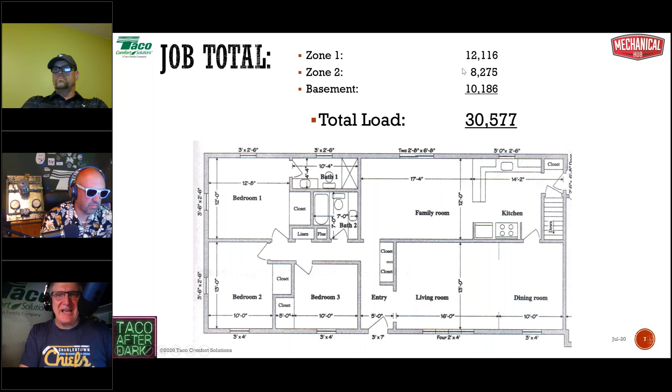We'll talk about boiler selection maybe next week a little bit, but suffice it to say, we're not going to find a boiler that small. We're going to be finding a boiler bigger than this, and the question is just how much bigger. We're going to do the very best we can. So here's our total load of 30,577, and it's broken down by zone. Zone 1, 12,116 BTUs. Zone 2, the bedrooms, 8,275, and the basement, 10,186 BTUs.

Alrighty, let's take a quick look at zone 1 in the particulars. There's all of our pieces of radiation, and the total load is 12,116. So we've got to find the flow rate. And to find the flow rate, we're going to divide the BTU load, 12,116, by the product of delta T times 500. Okay, that's the universal hydronics formula. We've beaten you over the head with that through 2 different Taco After Dark sessions. I hope we understand how important that formula is.

So GPM, the gallons per minute flow rate you need to satisfy the heating load of a zone, is equal to the BTUH load of that zone divided by your designed for delta T, or the temperature drop of the fluid as it goes through the system, times 500. Now 500, of course, is that mathematical constant that we use with 100% water.

It comes from multiplying the weight of 1 gallon of water, 8.33 pounds, times the number of minutes in an hour, 60, times the specific gravity of the fluid, that's 1, times the specific heat of the fluid, that's also 1. So 8.33 times 60 times 1 is 499.8. Hey, I'll call that 500. So that's where we come up with 500. It just makes the math easy.

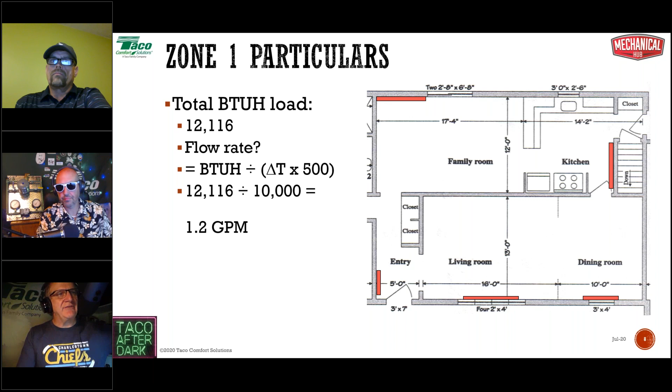So we do our math, 12,116 divided by 10,000. We're looking at about 1.2 gallons per minute of flow. That ain't a lot of flow. That's a very small amount of flow, 1.2 GPM for that zone. All right, so we know that's the flow rate. Now to size a circulator for that zone, we have to figure out the head loss of that zone.

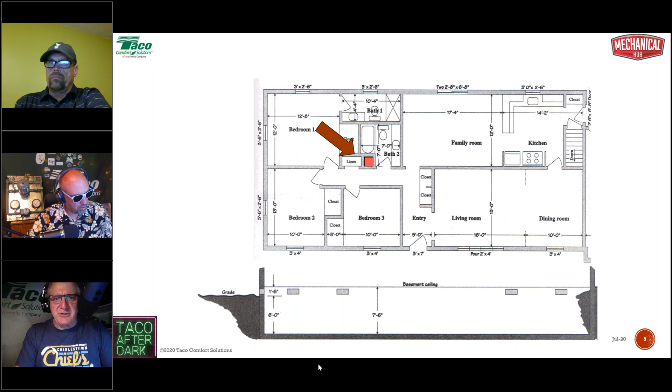So again, we've got to figure out where we're going to stick our boiler. If you take a look at that picture right there, there's the flue right next to the linen closet, and we're just going to go regular old boiler here. We're not going to get crazy or anything. So that regular old boiler is going to be down there in the basement, right underneath that. Okay, so there's your flue pipe, and there's the boiler right down there in the basement.

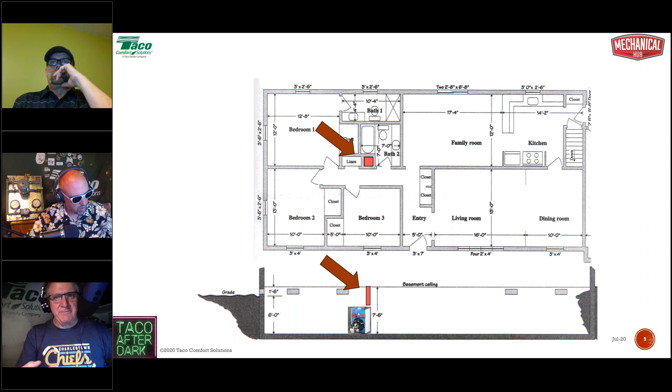So we can kind of estimate from this point how much pipe we're going to be running through all of those zones. So we can take a look at it like this, okay? There's our basic zone for that first floor. So we've got 8 feet, we've got another 10 feet, we got 20 feet there, 6 feet there, 16 feet there, and so on until we go back down to the boiler.

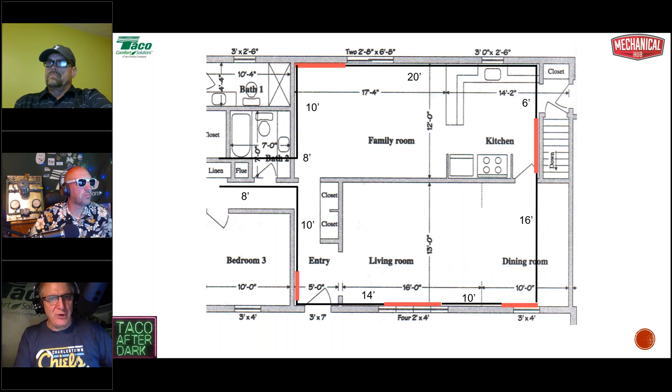And that's just, we can measure that on the plans. If we were doing the installation, we'd measure the pipe as we did it, or we'd take our very best educated guess as to how long that run would be. So we go through our additions here.

Now I got our entire first floor run of just pipe is 102 feet. The element in the baseboard, 25 feet. The up downs, we're going up, we're going down, we're going up, we're going down, is about 20 feet. And then the up down for the boiler might be another 12 feet. Total run, we'll call it about 159, 160 feet total from the gazouta side of the circulator all the way back to the gazinda side of the circulator. So that's our total run.

Now, if we were to estimate the head loss, this is your Friday afternoon, 5 o'clock, I got to get something down here, estimation. We would estimate our run, in this case, 159 feet, and then we'd multiply it by 1.5. That's going to allow for valves and fittings and stuff that's in the way, right? Fittings have the same pressure drop as pipe.

A 3/4 inch copper elbow has the same pressure drop as 2.5 feet of straight copper pipe. A 45 has the same pressure drop as 1 foot of pipe. A T has the same pressure drop as 5 foot of pipe, et cetera, et cetera. We can't count them. We're going to allow for them. And we're going to basically add 50% to the length to allow for those fittings.

So 159 times 1.5. And then to estimate the head, we'll simply continue multiplying, and we're going to multiply by 0.04. 0.04 represents 4 feet of head loss for every 100 feet of straight, properly sized pipe at the maximum flow rate for that size of pipe. You got to remember that part, guys. So 0.04 represents 4 feet of head for every 100 feet of straight, properly sized pipe at the maximum flow rate for that size of pipe.

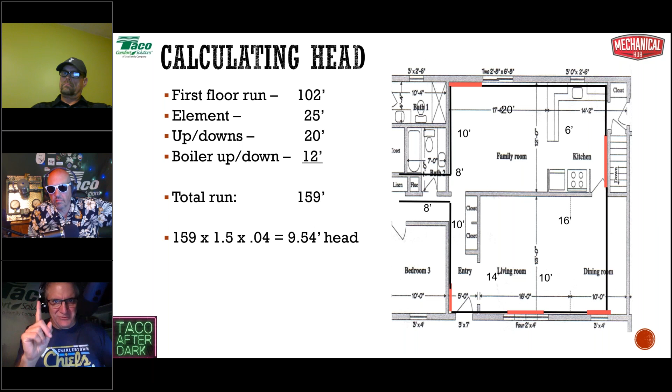So if we wanted a circulator just for that one zone, it would need to do 1.2 gallons a minute at 9.5 feet of head. Your 007 is going to handle that with no problems whatsoever. All right. But we also got to understand that's way more pump than we need. It's way more pump than we need. How much more pump? I'm going to show you how much more pump.

If you've been through these sessions before, you've seen this chart before. This comes from the Copper Development Association's Copper Tube Handbook. And it's a mind-numbingly dull book, but this one chart is pretty cool because it gives you the pressure loss of water due to friction in types K, L, and M copper, and it gives it to you in PSI per linear foot. So this is the pressure drop in PSI.

When we deal with pressure drop in our piping systems, we talk about feet of head. We have to convert PSI to feet of head, and we do that by multiplying whatever the PSI is by 2.31. Now, that comes from basics of day one of plumbing school. I don't know if you guys went over this in plumbing school. A column of water 28 inches high or 2.31 feet high will have a gauge pressure at the bottom of 1 PSI. Doesn't matter how big around it is, just how high it is. 28 inches or 2.31 feet high.

Now, the engineers will talk about PSI in terms of pressure drop. We deal in feet of head. All right, so whatever the PSI is, we multiply it by 2.31. That's the feet of head loss that we're talking about. It's got nothing to do with the height. It's got nothing to do with how high the building is. It's just how we express pressure drop on our end of the business. So yeah, that's kind of where we're at.

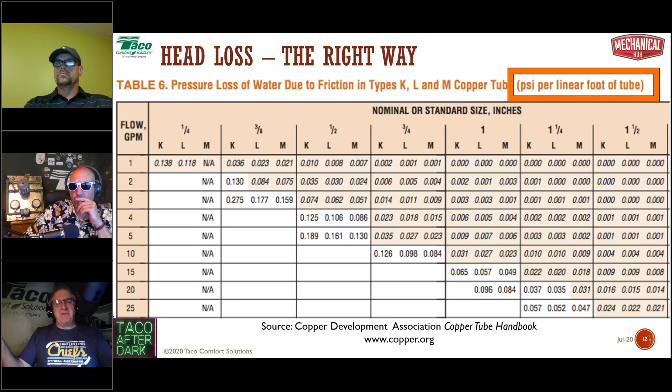So let's presume if you were doing copper fin tube baseboard, chances are you've got 3/4 inch element, and your default is to go to 3/4 inch pipe, right?

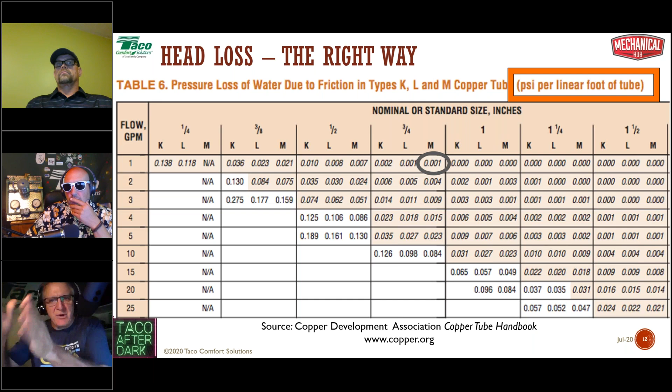3/4 inch pipe at 1 gallon a minute. My pressure drop through 3/4 inch type M copper is 0.001 PSI per foot of pipe, or 1/1000th of a PSI per foot. All right, that's not a lot of head loss, 0.001 PSI per foot. So let's math this out again here. 159 feet times 1.5, because we've got to allow for the fittings. That's going to give us 239 feet.

Now let's multiply 239 times 0.001. That's going to give us 0.239 PSI. That's the pressure drop, 0.239 PSI. So to turn that into feet of head, we're going to multiply by 2.31, and we're dealing with 0.6 of a foot of head. That's not much, okay? You could just get an aggressive hamster running through one of those exercise wheels, and that'll give you enough to pump 1.2 gallons a minute through that pipe. That's 0.6 of a foot of head.

Do you remember how we estimated? We came up with 9.5. All right, there's the difference. Now, I remember I said earlier the default is 3/4 inch copper, right? But 1.2 gallons a minute kind of fits in the wheelhouse of something else. I want a show of hands here. What would you guys say to using 1/2 inch pipe for this zone? Let me know what you think. Type something in. I'd like to hear what you guys have to say. Would you use 1/2 inch pipe for this zone?

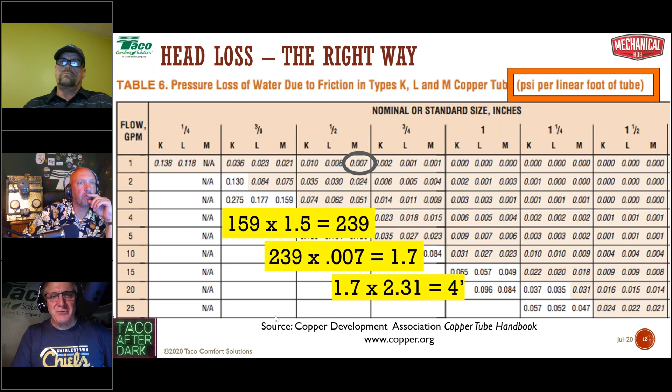Absolutely the head loss would change. But it also gives us the opportunity to use 1/2 inch pipe or even 3/8 inch pipe at this point. I mean, there's so many options here, man, when you're dealing with such small loads, you could do so many different things to the point where you could get yourself into that paralysis by analysis thing. So let's move on here and look at the rest of the house, okay?

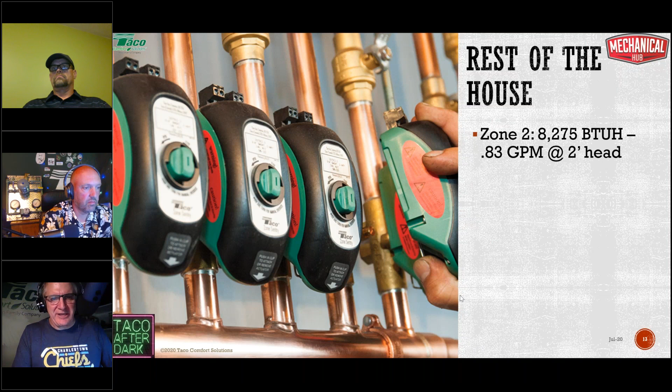Now, zone 2, we're looking at zone 2. In zone 2, we were talking 0.83 GPM, okay? It's 8,275 BTUs. We math that out. That comes up to about 0.83 GPM at a little less than 2 feet of head, okay? Not much, just about 2 feet of head. And again, we're talking 1/2 inch pipe, and if we go to the basement, 10,186 BTUs, that's about 1 gallon a minute. Again, right around 2 feet of head, depending on how you pipe it up.

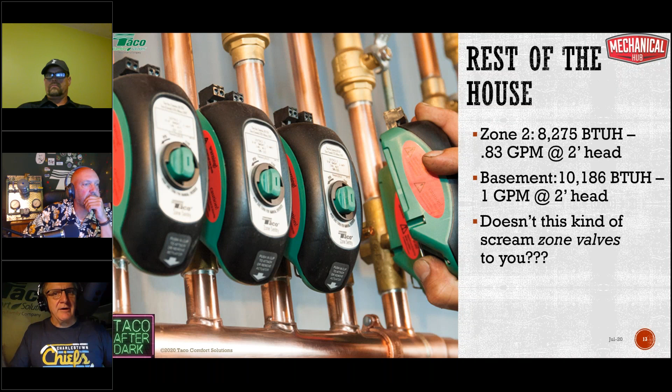So what this tells me is, right now this is kind of screaming zone valves. If I'm looking at this thing, I can't come up with a rationale for putting one circulator on each zone. Can anybody else? That's doing finished carpentry with a sledgehammer. If we've got one circulator to do 0.83 GPM at 2 feet of head, another circulator to do 1 gallon a minute at 2 feet of head, and a third circulator to do 1.2 GPM at 4 feet of head, that doesn't make any sense. If anybody feels differently, let me know.

But Dave, what do you think? Oh, I'm a zone valve guy all the way. I just prefer it, I know the capacity of these things on the circulator and what it's going to do. So, yeah, that's the way I'm designing.

Yeah. Robert O'Brien says, you guys sell circulators, right? And we also sell zone valves. So we got you going both ways, bro. We got both. Yep. We got both. Buy all you want. We'll make more.

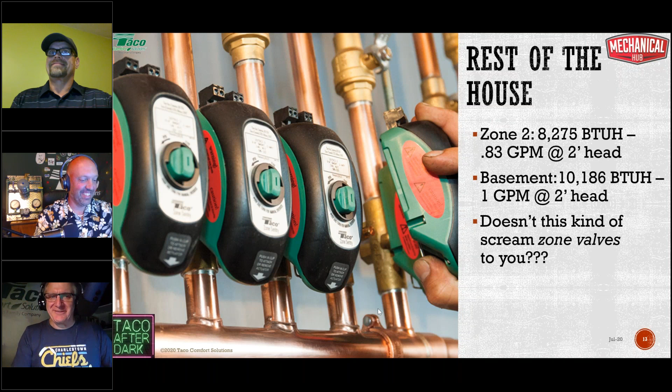Okay, so here's what we're looking at. We got 30,577 BTUs. That total flow rate's going to be just over 3 gallons a minute, and I got 4 feet of head, 2 feet of head, and 2 feet of head. Now we know head's not cumulative. When we're sizing a circulator for zone valves, we don't add all the head together. So it isn't 4 plus 2 plus 2 equals 8 feet of head. We just have to overcome the head loss through the worst case zone. If we overcome that, we can overcome the others. If I can do 4 feet of head, I sure as heck can do 2 feet of head.

So that's a common mistake people make when sizing circulators. The most common mistake is, well, I got to go up 3 flights of stairs, I need a higher head pump to get all that water up there. No, we don't, because up and down doesn't matter. It's a closed loop. The other most common mistake is, I add all the head loss together for all of my zones, and then I need one big honking pump for my zone valve jobs, and it is not necessary. In this case, 3 gallons a minute, 4 feet of head is what we're going to need.

Now let's take a look at a typical Taco 3-speed circulator, the 0015 3-speed, and pretty much anybody's 3-speed circulator is going to have virtually identical performance curves. Nobody's all that different. And we've got low, medium, and high. We'll put the 0010 off to the side for a moment, because the 0010 is a different cat altogether, even though it's a circulator and you certainly could use it here, but we're going to focus on the 0015. So let's take a look.

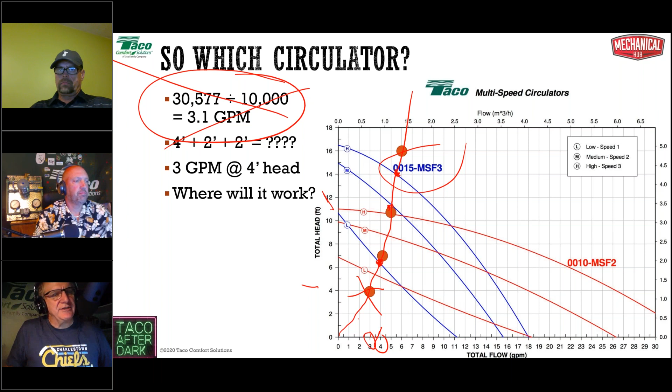So under design conditions, if we go back to that universal hydronics formula, GPM equals BTUH divided by delta T times 500. My BTUH is still 30,000, but now I'm at 4 gallons a minute and not 3. That 20-degree delta T I designed to, never going to see it. The best I'm ever going to see is 15. So that 33% increase in flow results in a 25% decrease in delta T.

So instead of the water going out at 180 and coming back at 160, it's going out at 180, coming back at 165. And the low temperature model, if it's going out at 140, it's coming back at 125. Doesn't sound like a big deal, but we're shrinking that delta T. What, folks, is that going to cause the boiler to do? We all know this. It's going to cause the boiler to short cycle, and it's just going to get worse because it's always going to be at 4 gallons a minute, even if that goes down.

All right, even if it will go down at 50% load, that's going to be 15,000 BTUs. I'm still going at 4 gallons a minute. That's going to be at 7.5 degrees. And you can see we've got a boiler that's going to be bigger than it needs to be anyway, right? Because we only need 30,000 BTUs. If it's not a ModCon boiler, it's still going to be bigger, and even if it is a ModCon boiler, if the turndown ratio doesn't go down that low, that boiler is going to short cycle even more.

All right. This is normal hydronics. This is what we do. But this, folks, is where we get our efficiency. We want to make sure we match the flow to the load as best we can. With this application, yeah, you know, we're okay. It's not horrible, but this is as good as it's going to get. All right. I just want to show you the rest of the other zones as we put them in here.

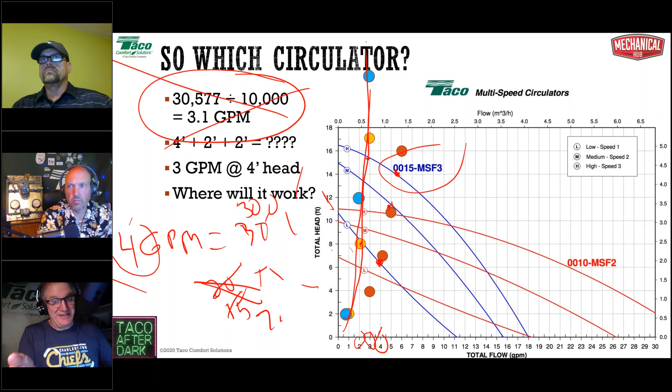If you use the 0010 here, I swear the 0010 at low speed would be a far better choice than the 0015. I guess the 0010 is going to be a more expensive pump. It's designed to be a B&G 100 Taco 110 replacement pump, on the return side of those big old honking boilers, that's what it's designed to do. But in this case, it'd be a better choice. It'd be a much better choice.

Okay, and that's why you want to make sure that, hey, I'm gonna make sure I pick the right pump performance curve by going to that low speed. If I go to medium speed, I'm saving some watts, but I'm still not doing myself much of a favor in terms of the incredible shrinking delta T. And I say, "Oh, the hell with it, I'll just put it on high and walk away and be safe." Well, I've got no variable speed in this whatsoever. All I'm doing now is I've cut my wattage in about half. That's about it. Okay, not a bad thing.

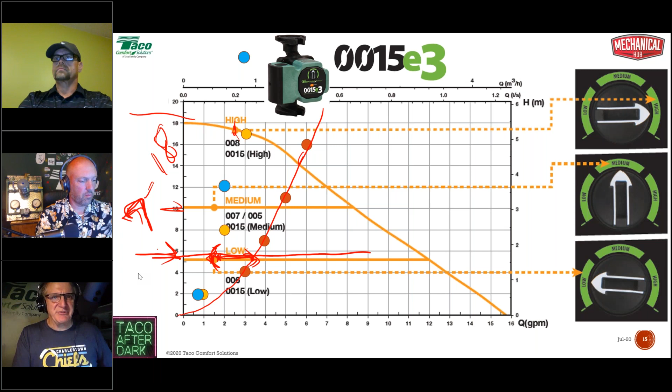So hopefully that helps you. Now, before we turn it over to Kevin, and again, we're gonna go over all these questions here. Boy, oh boy, Kevin, I didn't leave you much time, man. I'm sorry. That's okay. We got to talking. We got to talking. Alrighty.

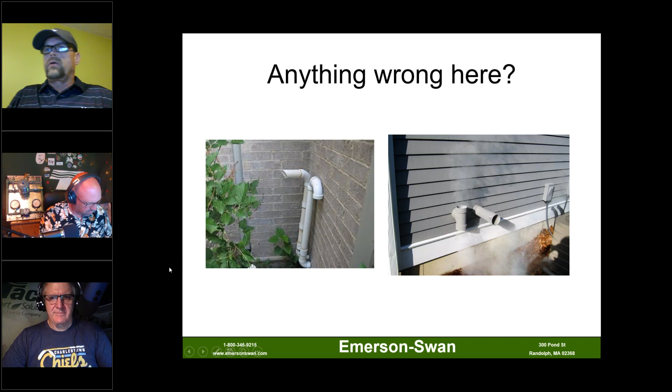For you oil guys, having to step outside of the house and take a peek at vent terminations also is pretty key, because you may find something obvious. It may be more difficult to locate a problem, but if these vents aren't working right, well, we got a problem, because in my not so humble opinion, the vent is simply the most important safety device on the appliance. Without pulling any punches, what's the vent doing?

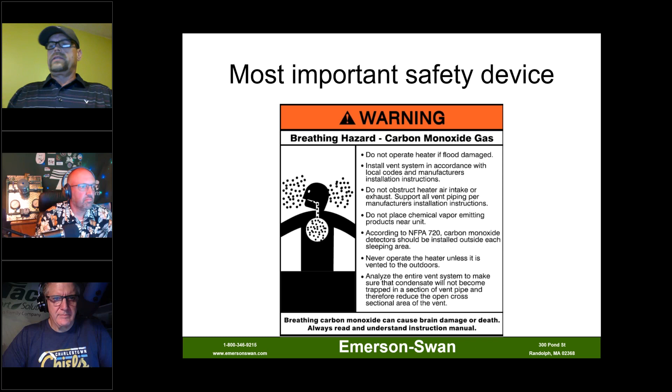The vent is basically taking what could be poisonous gases, in the worst scenario deadly gases, and moving them from a conditioned space to the outdoors where they're diluted and become less or not a hazard to the occupants inside. So the device that's moving poisonous gas out of the space is, arguably, the most important safety device. If that's not working right, then your combustion's not working right, and the safety of the occupants is in jeopardy.

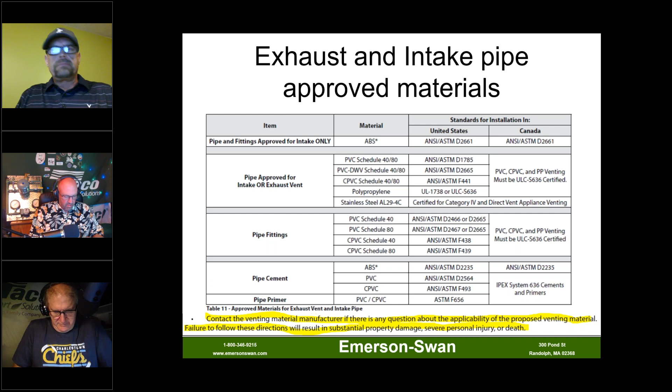Another thing we want to take into consideration on vent systems, right off the bat, is if they're built properly. The bottom line, if you look down at the bottom of that slide where there's a little highlighting, is if you ever have any question on the material, whether it's approved or not in your application, then contact the venting material manufacturer and ask them directly what the limitations are on that product and whether it's applicable for your job or not. So there is a level of due diligence that needs to be applied.

Whether you're working with gas or oil, there's various materials to work with, and before we put a combustion analyzer in a pipe, we better make sure that pipe is actually working right. You have venting options these days: natural draft, power vented, induced, and now balanced venting and unbalanced venting, pressurized, negative pressure. We have to know what we're venting into, how it's working, and if it's appropriate for the job. Again, if the vent doesn't work right, the combustion's not going to work right.

One of the things required for proper combustion is time. You need to hold those hydrocarbons in the heat exchanger, in the combustion chamber, long enough for a complete burn and for the energy to be exchanged. One of the many functions a vent does is provide just enough back pressure or static pressure against that flame to hold that combustion inside the heat exchanger. So if the vents aren't configured right, it's going to relate to several problems, most certainly including combustion.

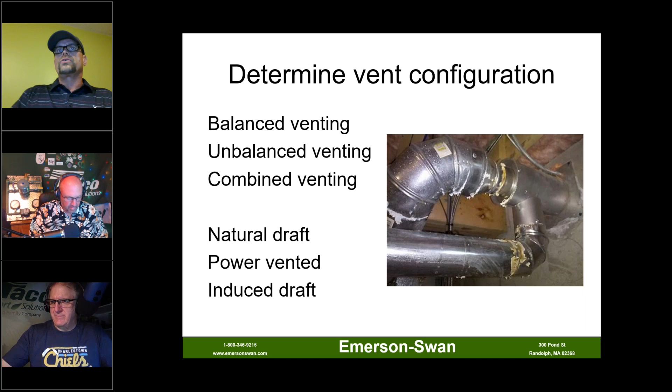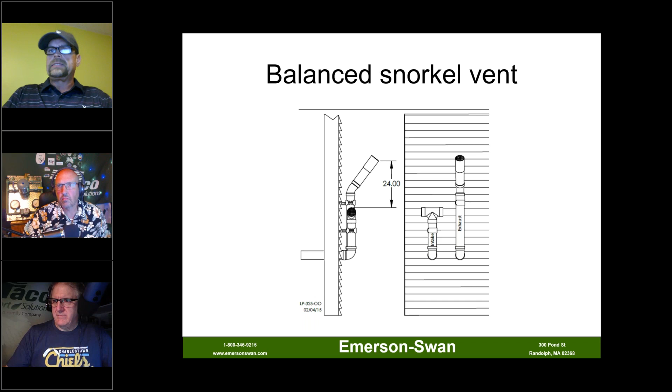So various options, whether it's a sidewall vent on a mod con boiler or snorkeling. Quite often we have to configure pipes to come up higher than snow grade. We're coming out of the side of homes, perforating quite often right down around grade level, so we have to bring these pipes up above grade, and even the way we do that is very specific and precise. There's diagrams laid out in all the install manuals.

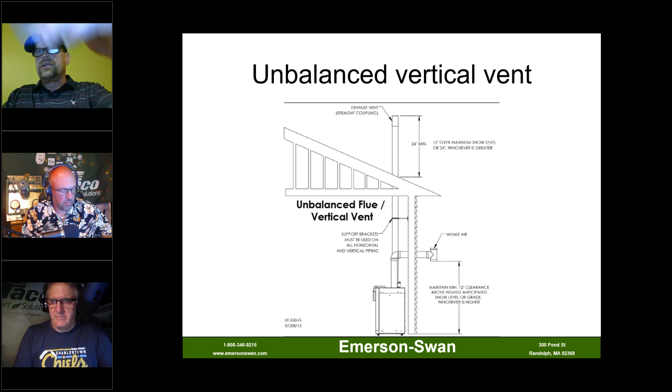So you have to know all of these systems. Yes, it seems daunting, and certainly it can be, especially for someone new to the field. But if we consider the vent the most important safety device, I'd be boning up on vents pretty quickly and early in my career. You also have unbalanced vent configurations where you can have pipes going through roofs and shorter pipes coming in, and understand that unbalanced is okay in certain configurations.

Using indoor air for combustion air: quite often, if there's enough air in the room, people aren't bringing an air intake pipe to the appliance. But it's never recommended to use indoor air for combustion air, because quite often the quality of the air is considerably poorer than bringing it from outside, not to mention getting into negative pressure situations.

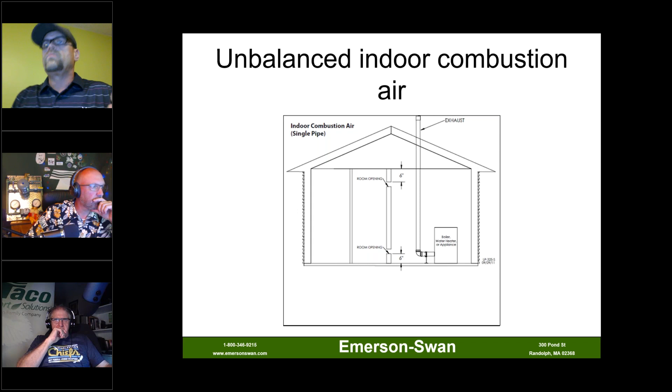And as you know, what will happen now, you'll have your negative pressure and it goes back to your combustion. So when we talk about confined and unconfined spaces, the bottom line is if you have 50 cubic feet of air per 1,000 BTUs, well, then you're in an unconfined space, and technically you don't have to bring combustion air in. But again, remember, it's always recommended to bring the outside air in when you can to avoid negative pressure, higher infiltration factors. There's a whole host of reasons, pets, dryer lint, all sorts of things.

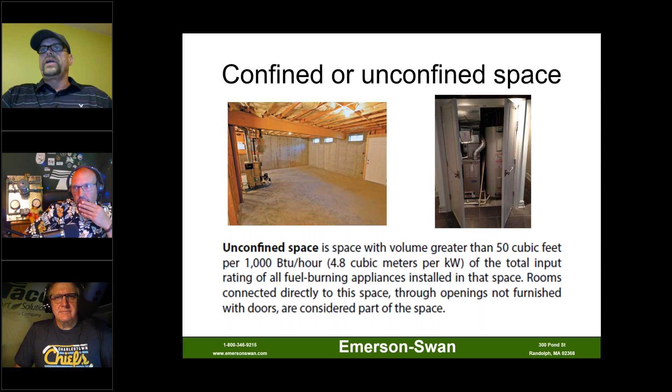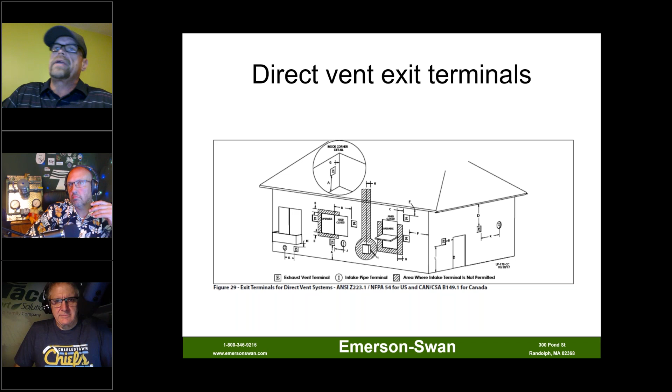They work as one. We have to be cognizant of where the vents are terminating. There's a lot of rules and regulations about windows and mechanical openings and mechanical air intakes, et cetera. So all of these things, I mean, it's a lot, but they're in the manuals. We should be able to find them. And once again, any questions, you always run it by the manufacturer. I know I'm laying on this vent pretty heavy here, but I can't stress enough, if the vents aren't right, your system's not going to work right.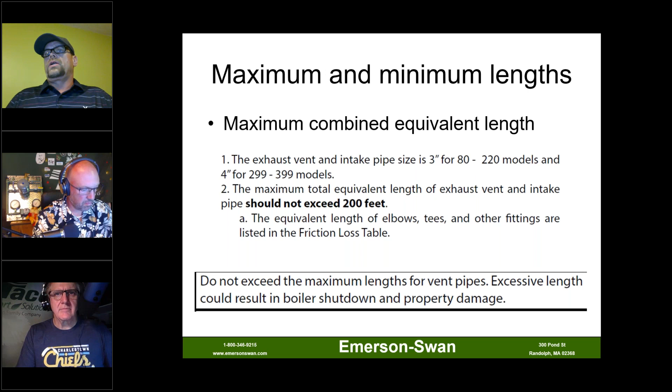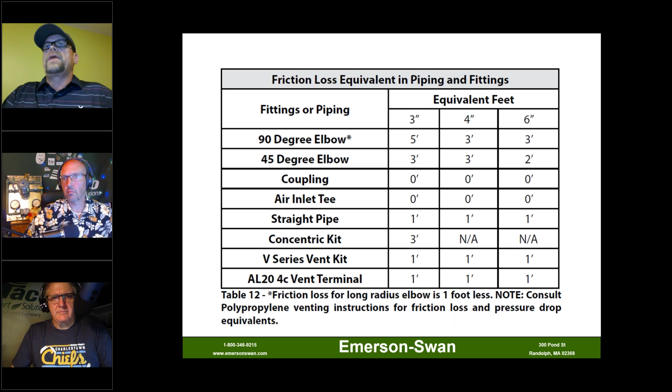You have maximum and minimum lengths on all these vents, and exceeding maximums or going below the minimums are going to cause their own particular host of problems related to combustion and safety. Just like sizing a circulator pump, when you have all your fittings out there and you're figuring your head, there's flow restriction of your flue gases through the fittings of the vent pipes. So we need to be aware that there are friction equivalences, and we have to figure all that into our lengths of our balanced and unbalanced systems to make sure that we're not suffocating, if you will, the equipment.

So, hey, Kevin, I've got a question here for you. Yeah. This is from Robert O'Brien. Do you consider objects in the cubic foot calculations? He has hoarders in mind. Oh boy. That's a good question. I haven't heard that one before. It's a great question, but I tell you what I'd be concerned with hoarders too is, I know it sounds crazy, but here comes the technical geek in me, you have a lot of off-gassing that's going to occur in that situation where you could be actually contaminating the combustion air coming in. So whether or not it's for air, even just for safety, I'd be bringing in outside air in those situations because the bottom line, a hoarder is only going to occupy space, unfortunately.

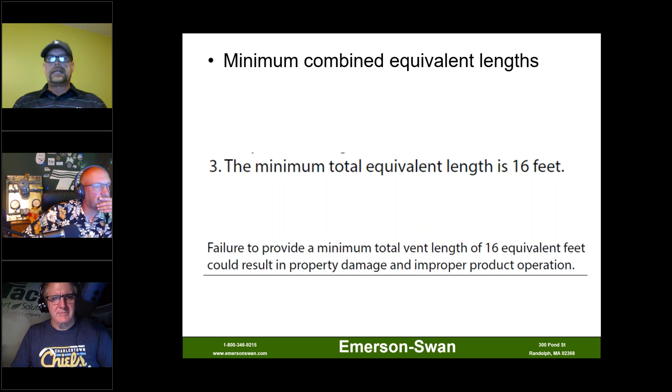I'm no expert on hoarders, but I've also had them as clients when I was a contractor, and I know for a fact that when the family comes in and cleans one room, a week later it's packed again. So it's a unique situation, and I would just take the guesswork out of it and bring air to the appliance and go on the safety level aspect of it. Good question. Of course, all the individual states may have their individual bylaws and things to consider also.

And when it comes to homeowners and vent pipes, there is a responsibility of that homeowner to keep the vent terminations, et cetera, free of snow, ice, or any kind of blockages that could cause backup of, worst case scenario, carbon monoxide into the home. So don't assume the homeowner knows that. Common sense isn't as common as it was in the old days. So make sure that when you have the ability, you address the homeowner and let them know that that is their responsibility, also to maintain the equipment too.

So why is combustion analysis important? Well, to me, the most important thing out there is people. So combustion safety to me is first and foremost. It's my duty, if you will, as a technician to apply due diligence and make sure that the occupants that are in that building or home are safe. And you're not going to do it with an eyeball. You have to take readings. As we know, carbon monoxide is a byproduct of combustion, and if the combustion is out of adjustment, it could get to pretty deadly levels pretty quickly.

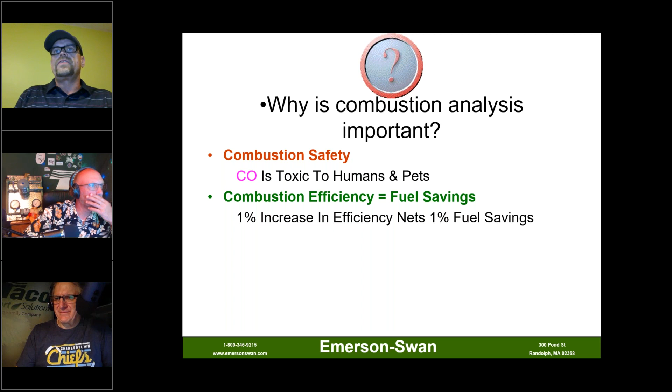Environmental measurements, of course, carbon monoxide, nitrous oxide, they're all hazardous to the environment. And CO2 is definitely a greenhouse gas. So we want to make sure that our equipment is operating within the normal levels that are prescribed by the manufacturer. And of course, combustion analysis for preventive maintenance.

Guys ask me all the time, do I have to open up the heat exchanger every year on a boiler? And every year I open it, it's clean, it's spotless. There's a couple ways of going about that. Well, you most certainly have to know what's going on inside of that heat exchanger if you're there working on it. And the way you can tell very quickly is to put an analyzer in the vent pipe before you even touch any nut or bolt on it, and just take a before reading.

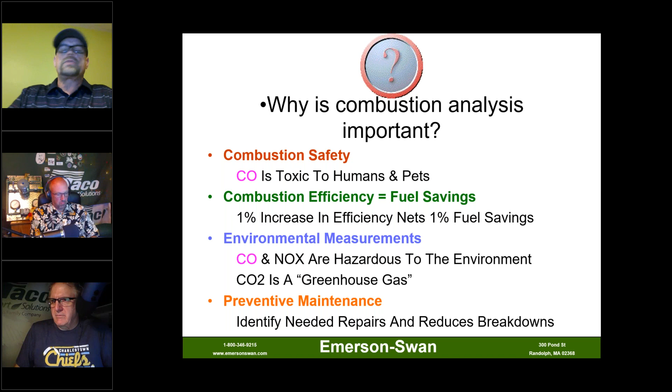This is how I found it. This was the condition it was running when I showed up, and I realized that it was running terrible. And the heat exchanger is obviously dirty. The CO and CO2 are very high, which indicates a dirty heat exchanger, a problem. And they can be very useful to help diagnose problems like cracked heat exchangers and leaking appliances also.

So the bottom line is, a combustion analyzer is really the best tool out there to ensure safe, reliable, and efficient operation of the burners, of the combustion process. So things that we're going to be checking and testing: draft. Well, draft is extremely important. We can't have too much draft. We don't want too little draft.

An oil burner, if you have too much draft over the fire of an oil burner on a retention head burner, literally you will start pulling the flame right off of the retention head, destabilize the flame, and start making trace levels of smoke, which becomes soot, which, you know, the rest of the story there. So draft is extremely important.

I certainly don't want to stick a very expensive analyzer in a vent pipe that's running at a number 9 smoke before I realized, and I just clogged up all the sensors on my expensive analyzer, and all I had to do was literally either look at it or run a little smoke test in there.

So excess air. Well, excess air, we'll talk about that in a minute. It's important. We need it to maintain our highest efficiencies, but it also can be an enemy. There becomes a point where you have too much excess air and you start to radically decrease the efficiency of the equipment. Stack temperatures, indication of all sorts of things.

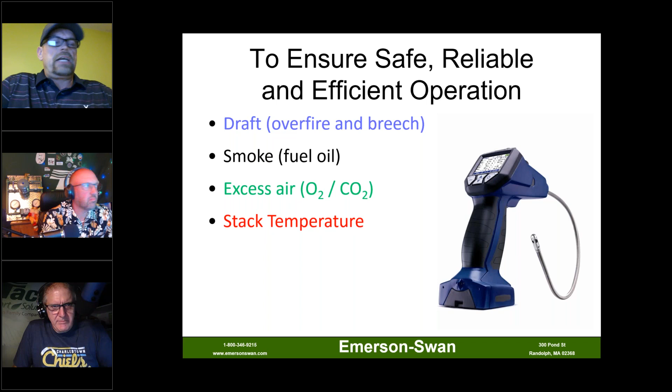You may be perfectly well adjusted and have high stack temperatures or lower than normal stack temperatures, which could indicate things like air is getting in through a crack in the coping on one of the sections of the boiler or something like that. So again, by being able to know what the abnormal reading is, to find that anomaly, I say by default you become a better technician the more you use analyzers.

Carbon monoxide, what more can I say about carbon monoxide than it's a deadly gas. Colorless, odorless, tasteless, and very deadly. And if I can't smell it, see it, or taste it, well, I better have an instrument that can sniff it out, because if it's around, I don't want to be there.

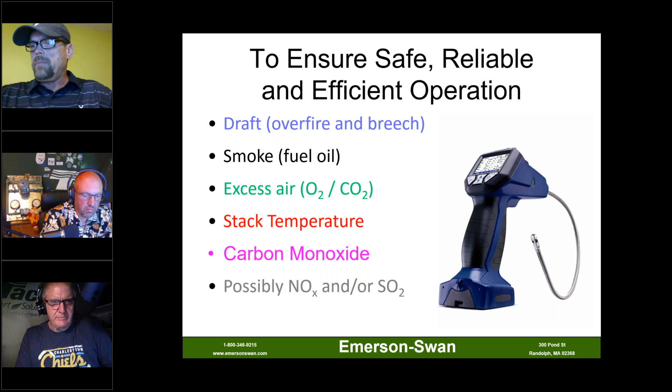And of course, when you get into commercial, industrial, and in some residential applications, and in the future, most certainly nitrous oxide and sulfur dioxide measurements. They're a byproduct of combustion and a pollutant, and we can measure and negate the production of NOx and SOx.

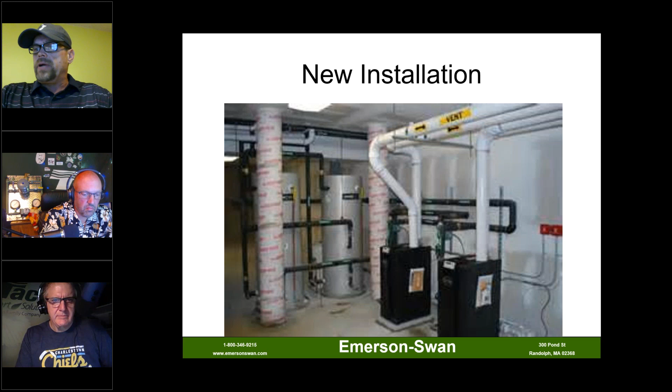So, all right, on a new installation, that brings its own host of procedures, if you will. So I can't stand plug and play. I hate that because it doesn't show any due diligence. It doesn't.

There's no effort there towards safety. You have to follow the rules. You have to follow the guidelines and do the checkoff lists and make the measurements and make sure the thing's working right. So the good thing is all of the information is laid out for us. We have the installation manuals, we have service manuals, and we need to follow proper procedure to make sure everything's working right.

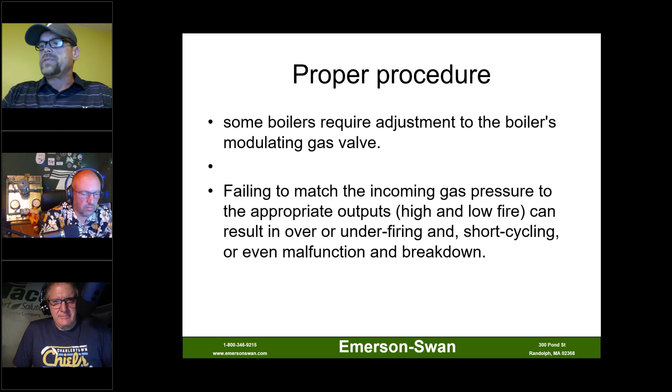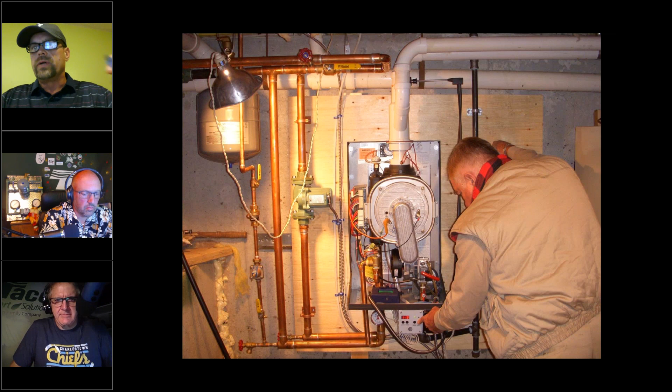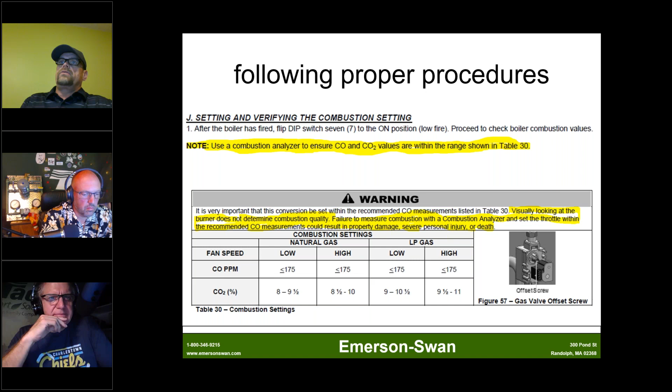So here's a new installation where we have a good friend, John Sawyer here, and he's adjusting a burner. So he's down there changing the fan speeds, and there's the probe in the vent pipe measuring the flue gases to make sure that everything's adjusted properly according to these settings that are in the manuals. So again, in yellow, use a combustion analyzer to ensure CO and CO2 values are within range. It says again in the warning, use a combustion analyzer.

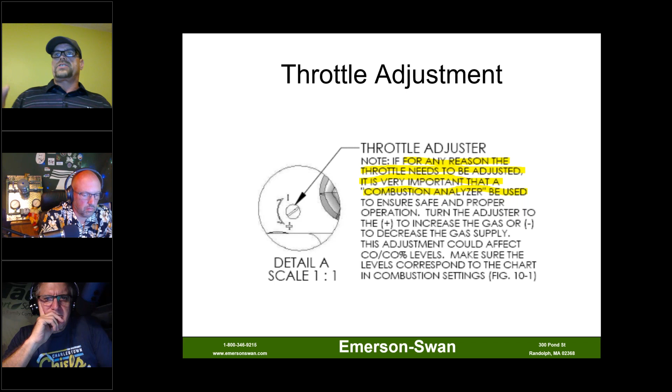Throttle adjustment, here's one of the ways that we are going to make an adjustment to the flame and change the CO and CO2. It says for any reason it needs to be adjusted, it's important that an analyzer be used. The bottom line is any of these adjustments, they can't be made unless you have an analyzer.

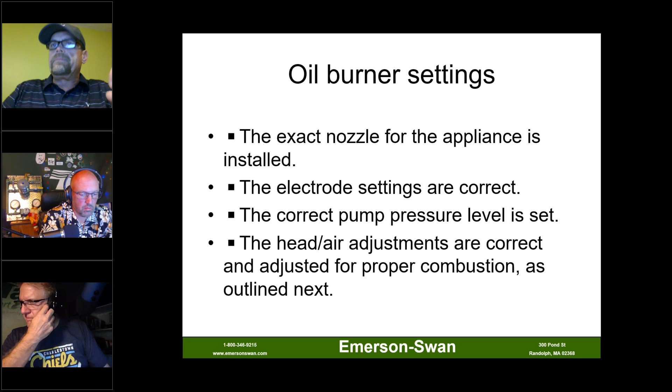Even oil burner settings, making sure that the right nozzle is in there can be a big issue. Even if the igniters are incorrectly set and dipping into the oil cone, that could be messing up your combustion right there. Pump pressure levels and the head and air adjustments are correct. These are all things that, of course, there's the air gate. These are the ways that we're going to be changing the CO and CO2 and smoke levels.

A little notable quote here, and this is from one of the dreaded enemies, the insurance company adjusters. So they know very well. This is in one of their guides. An analyzer is even more important with modern equipment. The operating data specifies adjustment of the burner in terms of waste gases. It's simply not possible to adjust it in any other way.

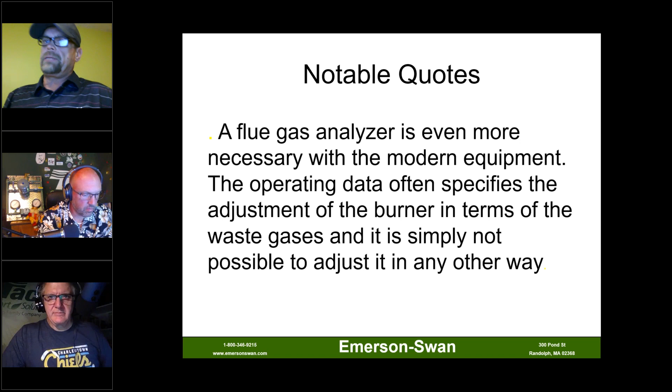So in other words, they're saying, I don't care how many years you've been in the business and you looked at the flame and it looked like it had nice little blue tips on it. That doesn't cut it. So, looks good to me, the eyeball method, no more. Doesn't work. So we can guess, right? No. We have carbon monoxide again we have to worry about. So that analyzer is going to be able to smell that for you.

So just so you know, on average about 20 technicians are killed by carbon monoxide annually in the United States. That's a big number in my opinion. And that can be avoided if you have no other means and you have a combustion analyzer: you can put the analyzer in an ambient air mode and check for carbon monoxide in the rooms that you're working in, especially if it's in a confined area.

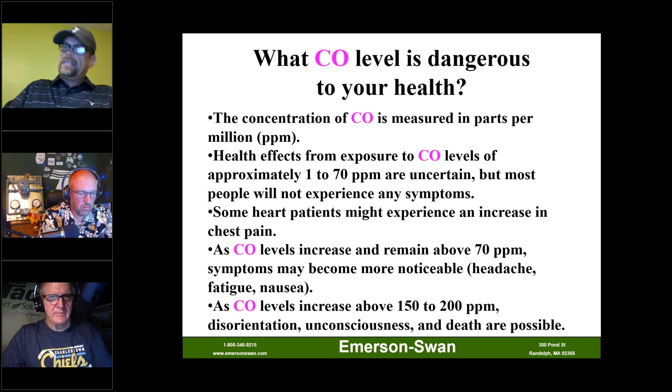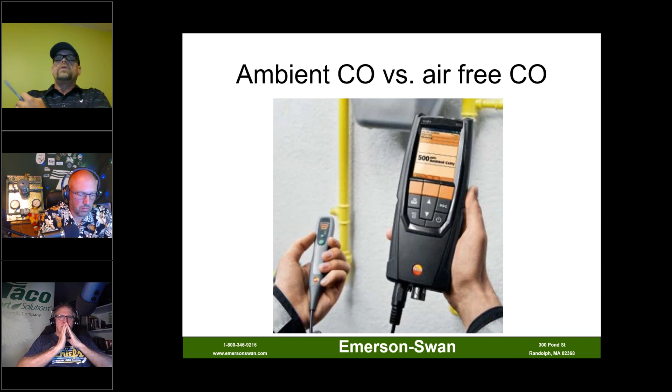So we don't really need to get into all the problems of CO, but the bottom line is the more of it that's in the room, the faster that it can get us to the hospital and even kill us. And the fact of the matter is, even long-term exposure to low levels of CO is very bad. So I mentioned if you have an analyzer, you can put it on ambient CO and just check for the carbon monoxide content that's in the room.

Another thing that's happening quite often, and frankly, I know I sound like a stickler here, but combustion analysis is so important that quite often there are fire departments or inspectors that are requiring that the technician stand inspection and actually perform the tests in front of them. That's how important it is.

So I mentioned due diligence. The care a reasonable person exercises to avoid harm to people or property and reasonable steps in order to satisfy a legal requirement. Well, I'll tell you what, being able to print off a flue gas analysis and have that as documentation, especially, as I mentioned earlier, doing before and after tests as a CYA, is fantastic.

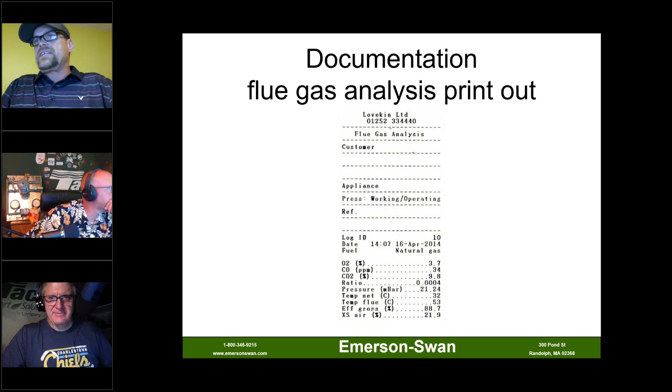I can say, hey, listen, this is exactly how I found it operating when I showed up, and I did X, Y, and Z according to my procedures, and when we were done, we set it back up and ran off another printout, and here's our documentation to prove that. As opposed to saying, I don't know what happened. I mean, the flame looked awesome when I was done. I closed the damn door and I went home. The thing was working beautiful. I've worked on these all my life. It doesn't cut it anymore these days, unfortunately.

So I used to tell my guys when they work with me that little printout, when you get into a sticky situation, literally could be your get out of jail free card. If you don't have it, well, then everyone starts pointing the finger, because all the technicians know the last screwdriver rule, right? Doesn't matter what happened before you got there. You were there. You put a screwdriver on it, you own all the liability now. That's the way it seems to be.

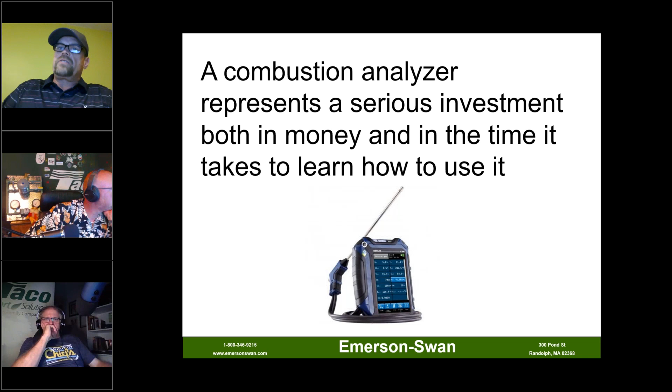So the analyzer itself. The analyzer is going to be an investment, and it's not only an investment in money, it should also be an investment in time to learn how to use it, okay? Most people, including myself, you hand them an analyzer and expect them to know how to run it, know what all the values mean, and how to analyze it and reference it. It's daunting. There's a lot there, but bottom line is, don't buy an expensive piece of equipment and not know how to use it. So read the manuals. That's first. Find out if the manufacturer has training that you can go to and actually learn how to use that.

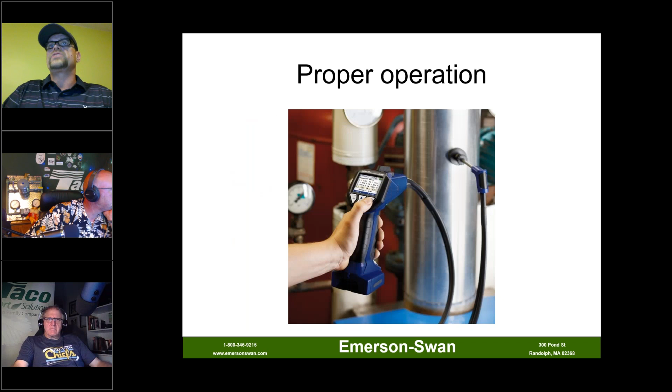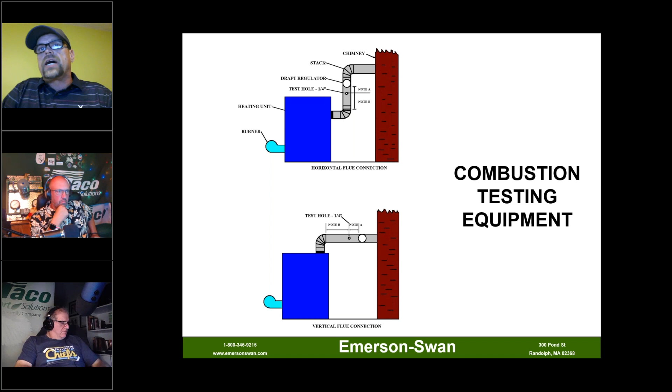On-the-job training. Make sure that you're going out with your technician and making sure that they actually know how to use that analyzer to their full advantage and what the readings mean, and that, in fact, they're using it right. You don't just stick an analyzer in a vent pipe. The vent hole has to be in a specific place so it's not reading diluted gases or something improper.

So another thing to consider with combustion analyzers is maintenance and calibration. Now, if the analyzer hasn't been calibrated within the manufacturer's specifications, then the readings are invalid. When I said that it could maybe cover your ass in a legal situation, this is how it was running when I left, well, if your analyzer hasn't been adjusted or calibrated in 8 years and it's beyond the manufacturer's recommendations, then those readings are in essence invalid.

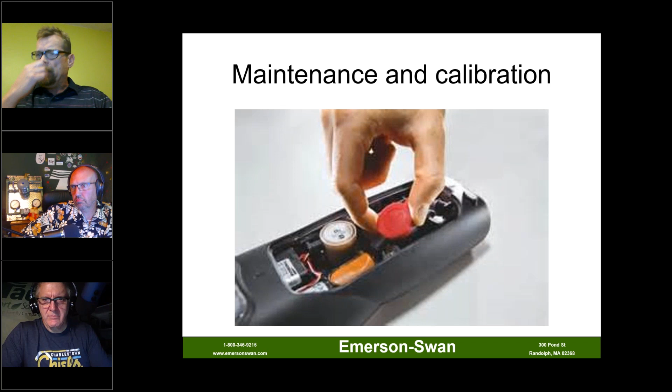And be careful of where they say you can do field calibrations. You can certainly replace sensors in an analyzer and punch in the code that it gives you and it does a self-calibration. But be careful on whether or not that constitutes the calibration as required by the manufacturer to make sure that it's covered in all legal aspects, if you will.

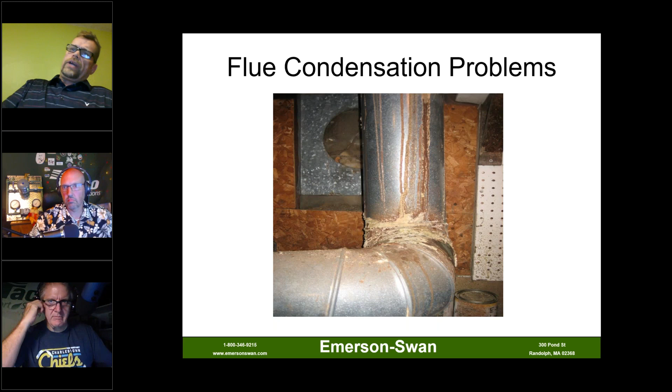So why are we testing? I mean, property damage, we don't want to be responsible for replacing siding, and I don't want to come home someday from a hard day's work and walk up my front steps and see something like that. That will not be a fun phone call to anybody. We need to know what's going on inside of the vents too, not just whether or not the readings are right, whether we're getting condensing issues and things like that. It can all be figured out by the combustion analyzer. We can't look at a flame anymore. We don't want puffbacks and things destroying homes. We need to be testing, not guessing.

So we can use our analyzer to find cracks in heat exchangers. There's several tricks that we can use, including understanding that if we're doing combustion analysis on a furnace and all of a sudden the blower fan comes on and our O2 starts going up and our CO2 starts going down, and we're wondering what the heck's going on, well, the only thing that changed at that moment was the blower fan came on. That should be a clue right there. You can do draft readings with no combustion and check the static pressures and see if your static pressures are changing in the combustion chamber just by turning the fan on and off with your draft gauge.

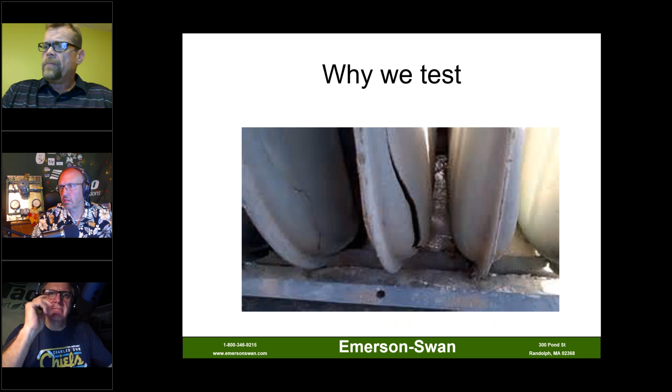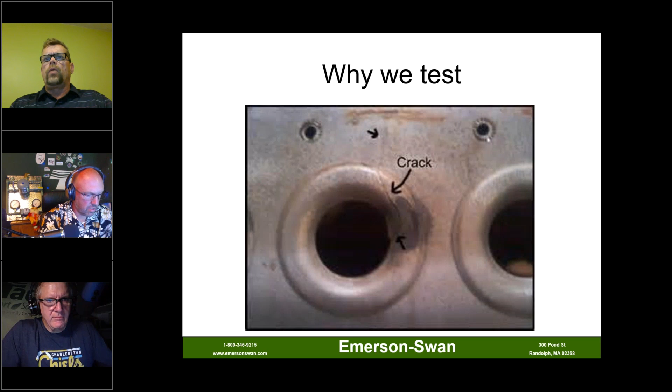You can have a gauge that's sensitive enough to be able to pick up cracks as tiny as that in a fire tube. So there's no way in hell we're going to find that typically with an eyeball very quickly. But with a gauge, we know that we have the problem because we can sniff it out.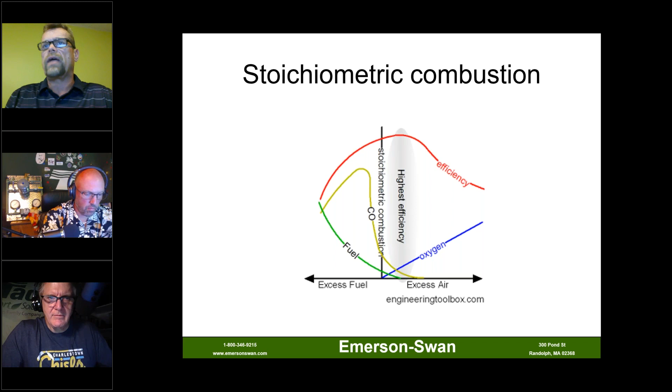So when you hear about excess air is necessary, typically in a perfect world, we would only have about 5 to 10% excess air on natural gas and somewhere around 5 to 20% on fuel oil. But quite often on fuel oil systems, I've seen excess air running as high as 50%, and the technician telling me that it's running correctly. So obviously there's a little disconnect there. There's a little training required.

So excess air, once we go beyond that point, it starts to lower the efficiency. So it will lower the CO2. We can see that on our readings. The stack temperatures are going to increase. As the volumes of gases increase, the velocity is going to increase, causing stack temperature to go up. So when the stack temperature is going up, your efficiency is going down.

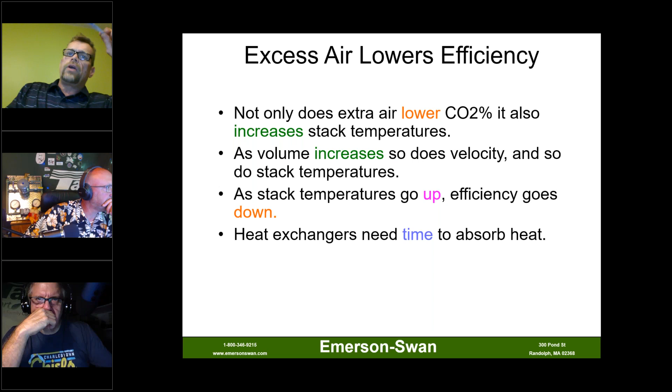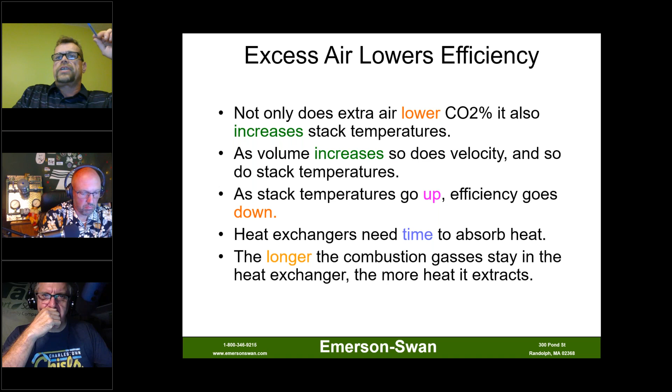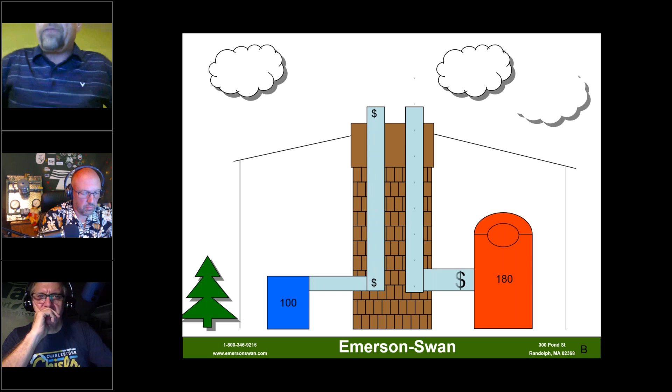Remember what I said, if your velocities are going up, you may actually be not allowing that fuel enough time in the heat exchanger to absorb the heat, causing unburned hydrocarbons, and again, higher losses. So the longer the gases stay in the heat exchanger, the more we extract. So the bottom line is the hotter the system, the hotter the flue gases, the more waste that's going out. So going back to hydronic systems, if we can design lower temperature systems, including lowering our flue gas temperatures, we can save everybody a lot of money.

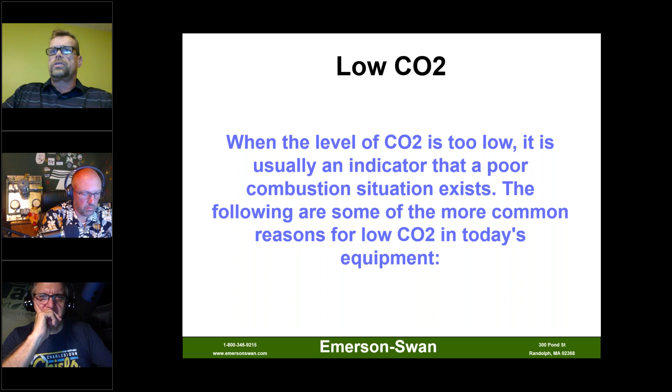All right, low CO2. We're getting near the end here. When the level is too low, of course, a bad combustion situation exists. So here's some straight up reasons why we have low CO2. If you can't get that CO2 to the reading that you need, typically it's an air to oil blend mixture. You gotta adjust that air band. Poor atomization. Maybe the oil tank is outside in the cold and the oil is getting very viscous and causing, like on that scale I showed you, an increase of fuel on the scale, which be careful because that also can increase carbon monoxide. Incorrect chamber design, construction, not allowing proper time in the combustion process, excessive draft, we talked about that. Obsolete burners or damaged parts, of course.

Underfired. You see these big old boilers and they have a draft problem, so they go in, throw in a 0.75 nozzle when it was supposed to have a 1.5, and that's going to have its own host of issues too. You may not get those stack temperatures up high enough because now you're underfired, and you would have your low stack temperatures, condensing issues, all sorts of problems.

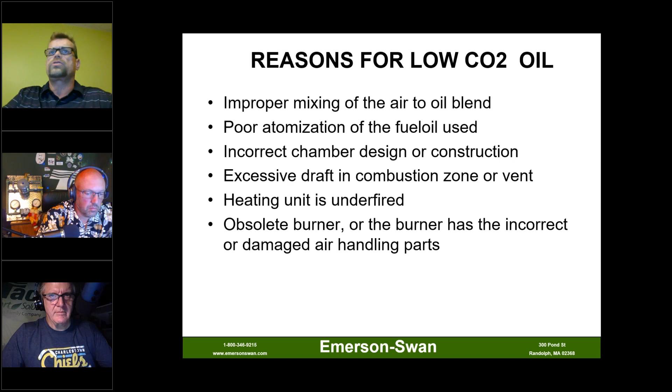Now with gas, maybe your manifold pressure is too low, bad offset adjustment, excessive pressure drop, so not enough gas supply. The mixture, of course. Cross-contamination, I mentioned that before, drawing flue gas in. And by the way, the easiest way to know if you have cross-contamination, drill a hole in the air pipe and put your analyzer in the air intake pipe.

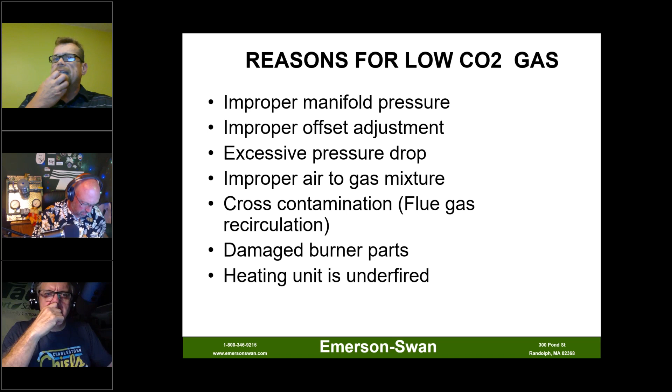If you have CO or CO2 in that intake pipe, or the O2 level, the oxygen level, is less than 20.9%, then I guarantee there's contamination in that pipe, and that's causing your combustion problems. So again, that analyzer is used as a diagnostic tool. Damaged parts, of course, will be a problem, or we mentioned under firing.

So the bottom line is, if you're not testing, you are guessing. And if you're guessing, boy, you're certainly increasing your liability potential. As they say, you're sticking your ass out there in the air. So you want to set it and forget it. You remember Mr. Popeil? Set it and forget it guy? That's the guy you want to talk to.

I mentioned by default, you become a better technician. By all means, the more you talk about excess air and O2 and CO2 and carbon monoxide, the better of a tech you're going to be. The easier it is to explain to customers why you need to take their system apart and reconfigure their vent properly, et cetera, et cetera.

And the bottom line is, in my, again, not so humble opinion, that's why I test right there. For those people that are sitting upstairs that are relying on me to have the professionalism to apply the due diligence that's required to make sure when I go to bed at night, I'm going to wake up in the morning.

Okay, and I would be remiss if I didn't talk about smoke detectors if we talked about carbon monoxide. So please remember to remind your accounts to change batteries or replace outdated carbon monoxide detectors. You'd be surprised, those 10 years goes by pretty quick sometimes on those carbon monoxide detectors. So anyway, thank you very much.